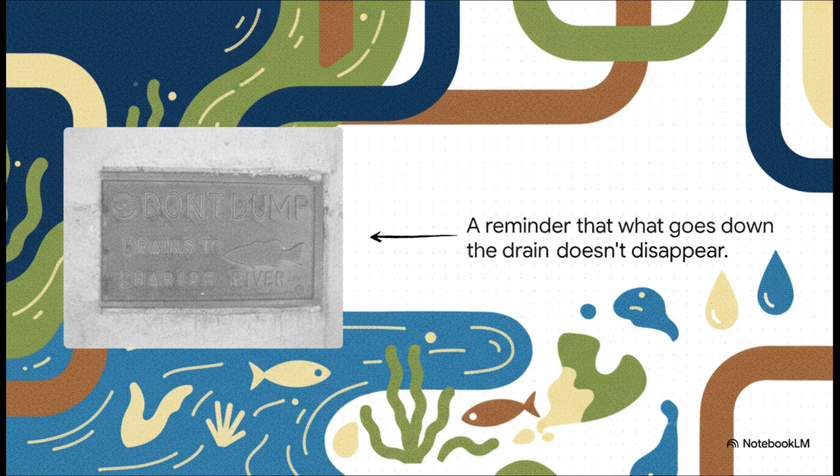So today we're going to follow that journey right from the very beginning. You've probably walked past a little plaque like this a thousand times and never really noticed it, but it's actually a huge clue. It's this direct, stark reminder that what goes down our drains doesn't just vanish into thin air. It has a destination, and that destination connects our homes, our lives, directly to the environment. In this case, right into a river.

Okay, so we know where the journey ends. But that's the final chapter of a really long and, you'd be surprised, a very complex story. So the real question is, what's happening in that hidden world between your sink and that river? Well, that's exactly what we're about to dive into.

So let's start right at the source, the moment that water leaves your faucet and swirls down the drain. It seems like the simplest thing in the world, right? But that single act kicks off a process that engineers and architects have been perfecting for centuries.

All right, so now that perfectly good water is sewage. So what's next? Well, it enters what you could call a hidden gauntlet right there inside your walls. And this isn't just a bunch of random pipes. Oh no, it's a really sophisticated system that's designed to obey a few very simple but totally unchangeable laws of physics. What I love about this is how simple these rules are, yet they control everything about how our buildings are designed. The pipe's got to be wide enough, at least 4 inches, so things don't get stuck.

They have to slope downhill constantly, and it's a fine line. If it's too steep, the water rushes past the solids; too shallow, and nothing moves. Gravity is the only thing pushing it all along. And maybe most importantly, the entire system has to be able to breathe.

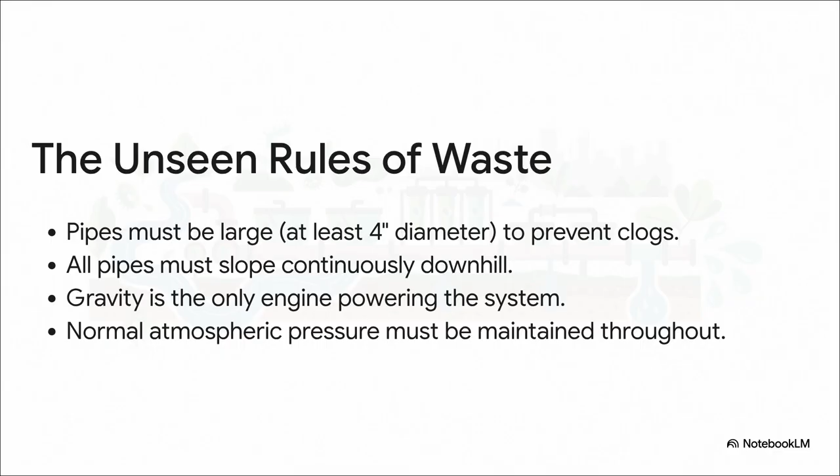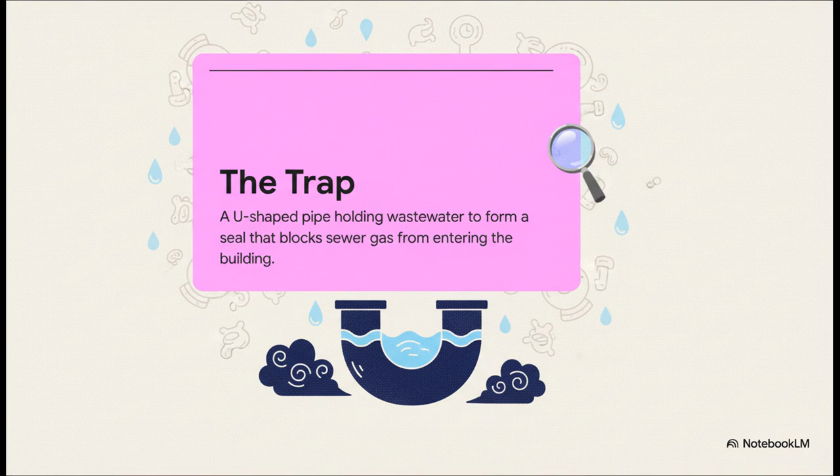So the first line of defense in this whole setup is a really simple but brilliant invention, the trap. You've got one under every single sink in your house. That little U-shaped bend is designed to hold a small plug of water, and that water creates a physical seal. It's the only thing blocking nasty and actually dangerous gases from the sewer from bubbling back up into your home.

But here's the catch. That simple little trap has a major weakness. When a big rush of water, say from a flushing toilet, goes down the main pipe, it can create this powerful vacuum behind it. And that suction is strong enough to literally slurp the protective water right out of the trap, breaking that seal and leaving your home totally defenseless.

So how do you fix that? With another beautifully elegant piece of engineering, the vent. A vent pipe connects to the drain right after the trap, and it runs all the way up through the roof of your house. So when that vacuum starts to form, the vent just lets in a gulp of fresh air from the outside, which breaks the siphon and keeps that little plug of water safely in place. It's literally a lung for your plumbing.

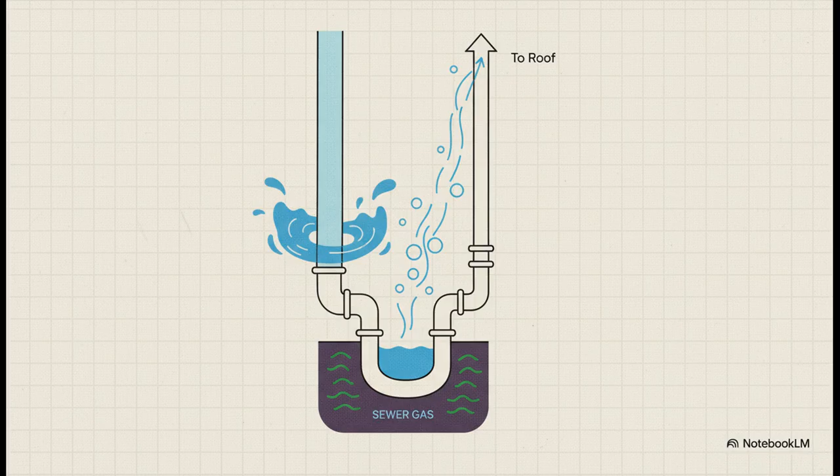And here's where all that theory smacks into reality. Older buildings often used these super durable cast iron pipes. The problem is, their inside surface is kind of rough. So when you pair that with modern low-flush toilets that use way less water, you get more clogs. It's a great reminder that this whole system is interconnected. You change one part, and it can affect everything else down the line.

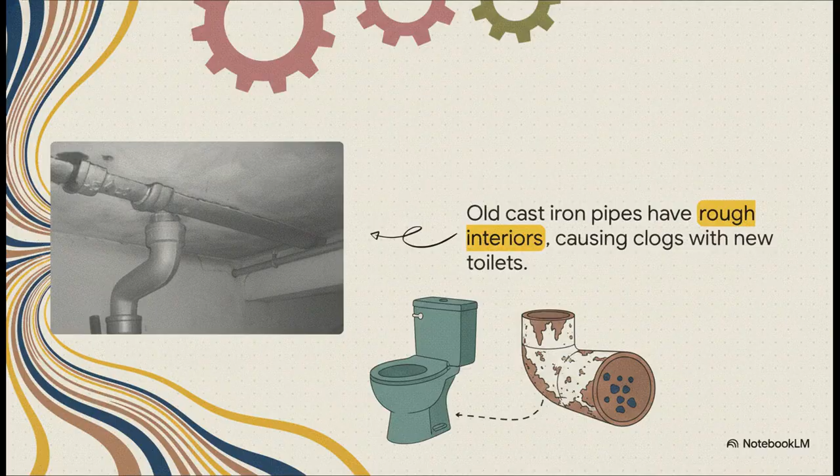Okay, so the waste has made it through the plumbing gauntlet. It's officially out of the building. But now what? Where is it all headed?

Now we get to zoom out and look at the massive infrastructure that handles all this stuff for an entire community. You know, you might think this is a modern problem, but it's really not. Humans have been trying to figure out what to do with waste for literally thousands of years.

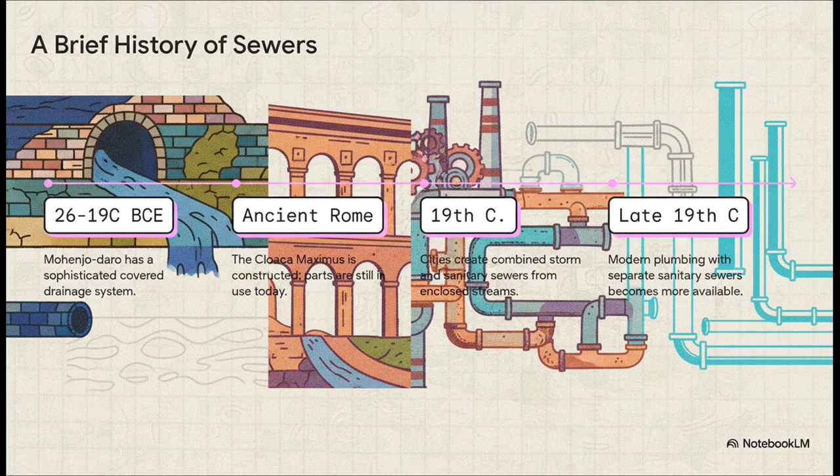From these incredibly advanced covered drains in ancient Mohenjo-Daro to Rome's famous Cloaca Maximus—and get this, parts of it are still in use today—all the way to the sewer systems we built in the 19th century that are basically the ancestors of what we use now.

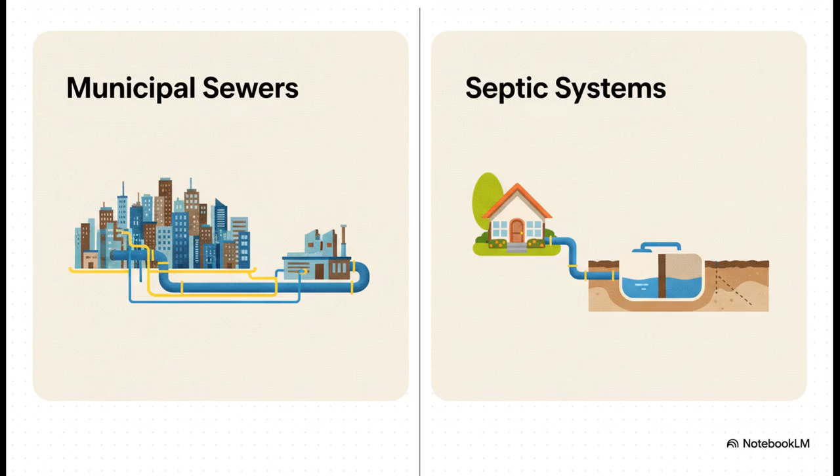So for those of us who do have it, the waste leaving our homes typically takes one of two main paths. If you're in a city, it's heading into a municipal sewer system, this massive underground web of pipes that funnels everything to a huge central treatment plant. But if you're in a more rural area, there's a good chance you're one of the 20% of U.S. homes that uses a septic system, which is like a personal on-site treatment plant buried right in your own yard.

So whether it's going to a sewer or a septic tank, we live in this flush and forget world. And man, it is convenient. But that convenience comes with a pretty big environmental price tag. The very thing that makes these systems so good at getting rid of waste has accidentally created a whole new set of problems, mainly by breaking a really important natural cycle.

Here's the problem in a nutshell. We grow food on farms, which pulls nutrients out of the soil. We then ship that food to cities, we eat it, and then we flush the waste, which is full of those same nutrients, away. But instead of putting those nutrients back on the farmland where they belong, we just dump them into our rivers and oceans.

So we end up with two big problems. Our farmland gets starved for nutrients, so we need artificial fertilizers, and our waterways get choked with too many nutrients, causing these huge destructive algae blooms.

So that all sounds a little bleak, doesn't it? But this is where the story gets really interesting and, frankly, really hopeful. The most exciting new ideas are all about completely rethinking this process. Instead of seeing waste as this terrible problem we have to get rid of, innovators are starting to see it as a valuable resource we can actually use.

A huge part of this shift is just getting smarter about water itself. I mean, not all water is created equal, right? You've got your high-grade potable water, the stuff you can drink. Then there's gray water from your shower or your laundry, which is pretty clean. And then there's black water, which has the toilet waste.

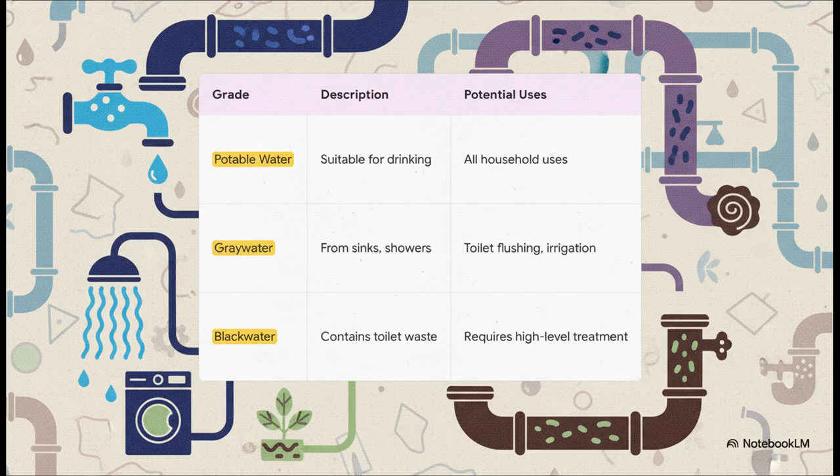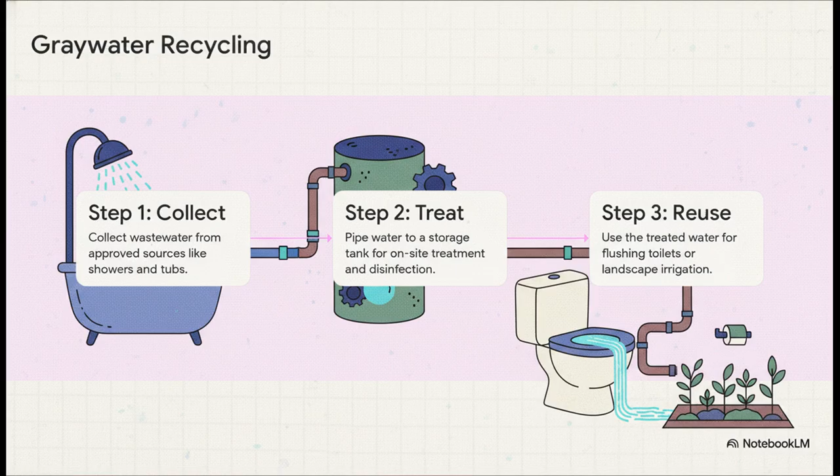So why on earth are we using pristine, drinkable water to flush a toilet when slightly used gray water would work just fine? That's exactly what gray water recycling is all about. The logic is so simple: you just collect the water from, say, your shower, run it through a basic on-site treatment system, and then use that cleaned up, non-drinkable water for things like flushing toilets or watering your garden. It's a super direct way to cut down on how much fresh, potable water we need to produce.

And we can take it even further by basically copying what nature already does so well. Things like constructed wetlands are a perfect example—you can actually build these small, contained ecosystems that use plants and microbes to naturally purify wastewater. You're literally turning a disposal problem into a thriving little habitat. How cool is that?

And the cool ideas just keep coming. People are developing all sorts of amazing things, from indoor greenhouses that use snails and fish to clean water, to these super efficient little mini sewage plants, all the way up to huge lagoons that treat waste using just the sun and wind. It's all about finding ways to work with nature instead of fighting against it.

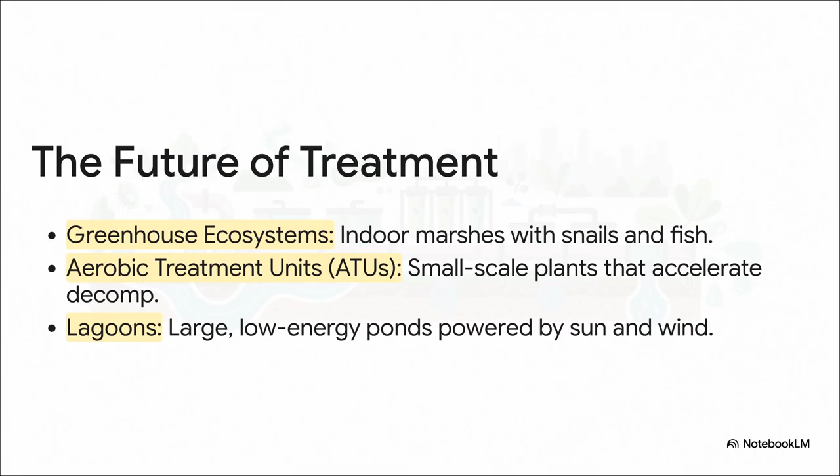And that really brings us to the final big idea here. This whole unseen journey of our waste, it's a story of amazing human ingenuity, for sure, but also of some pretty big unintended consequences. The next chapter really depends on all of us making a mental shift to stop seeing waste as the end of the line and start seeing it as the beginning of a whole new cycle. So what if our biggest sanitation problem could actually become one of our most valuable resources?